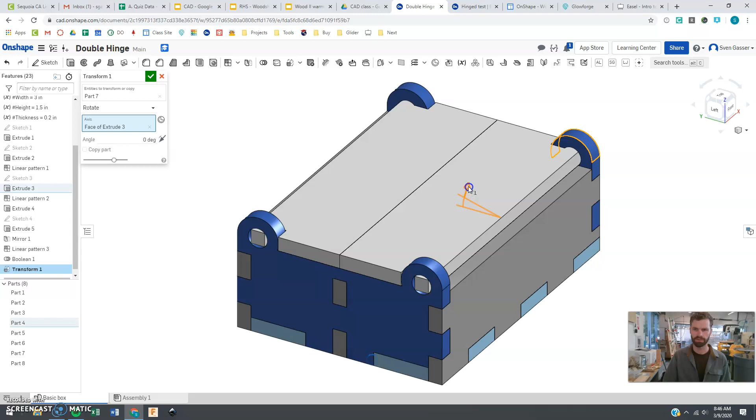Hello everyone, we are making a double hinge box. So you can see the lid's going to open like this, and you'll have one compartment on one side and then the same thing on the other side.

So we're starting with the box we made from last time. Go change these numbers, make it the size you want before we get started. And let's jump right in here.

So the first thing we're going to do is change the lid. So the lid no longer needs to go all the way across, it needs to go only halfway.

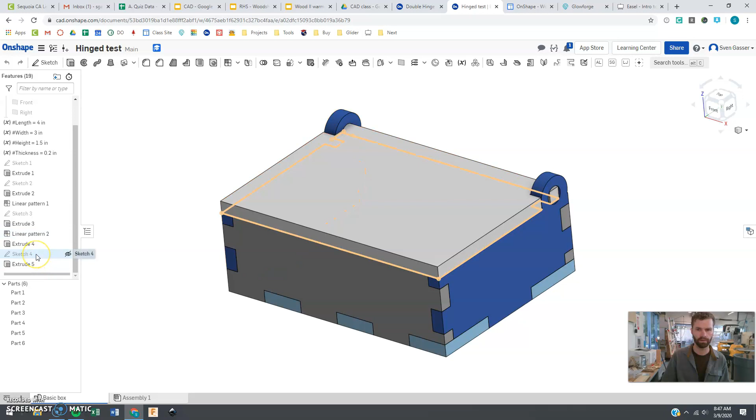So let's find our sketch that is controlling the lid, and that's not it. There it is. So let's open up this sketch, and let's look at the top view.

And we want to create a new line that's not going to be the center of this line because that line is not going the full distance right now. So let's just make an arbitrary line that's not locked into a certain position, making sure it's horizontal there.

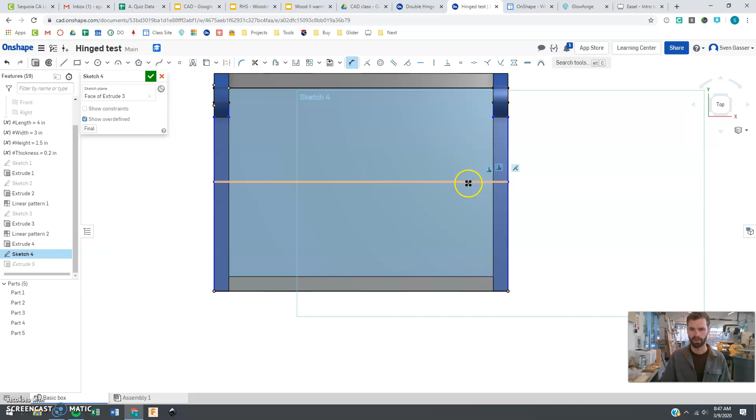And we're going to say the distance from there to there is the width divided by 2. So that's the real half of the box there. So now we can push OK.

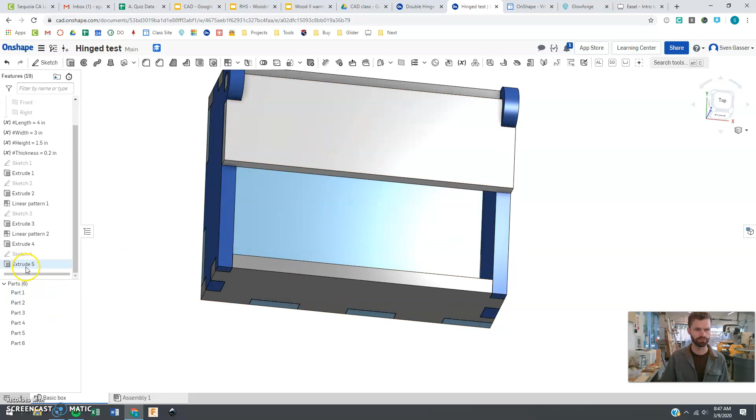Now I see my lid is only extruding this half there, which is great. Then, to make the other half of the lid, I'm going to use this mirror, which is not in the sketch mode. This is in the 3D modeling mode.

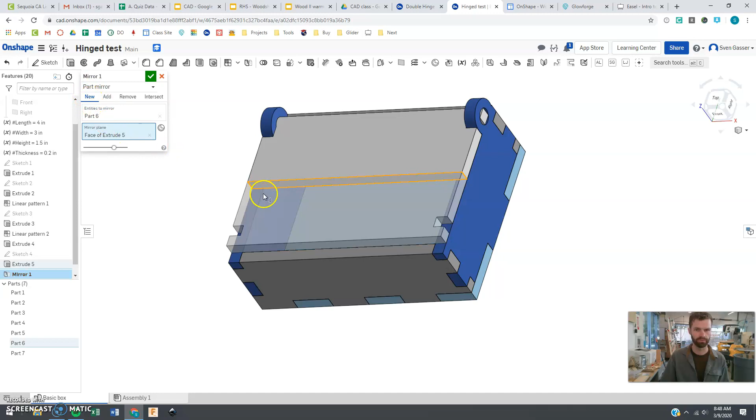And I'm going to mirror off this plane right here, making sure it's going to be a new feature, and that's looking pretty good. All right, now you can see right away the next thing we need to do is make sure we have the rest of the hinge on our side piece there.

So we're going to go back into this sketch that we have here, look at it from the straight on, and now we are going to create a mirror line that's exactly down the center.

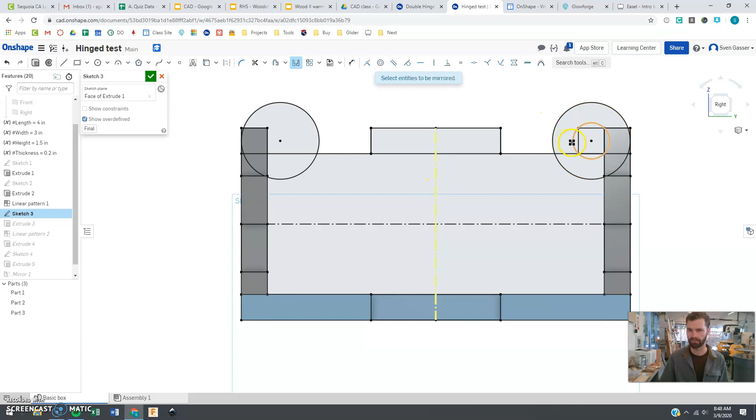And we're going to reflect this hinge construction parts that we have over here. And that's looking pretty good.

All right, and then we're probably going to have to change this extrude here, because right now it's not extruding all the parts we want.

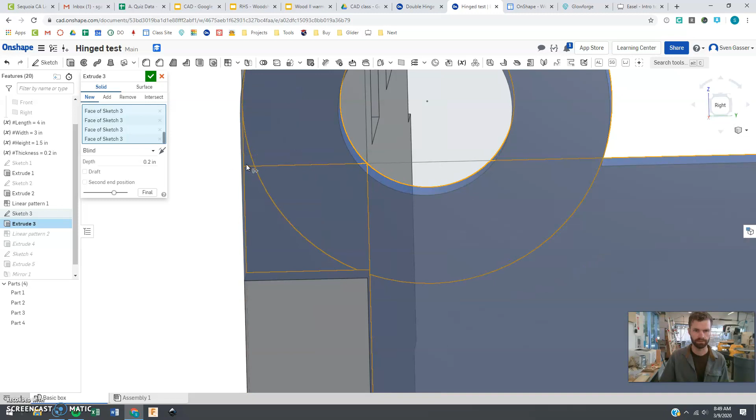So we want to extrude this and this and this, and let's get this little guy in there too. Make sure we get the little guy over there too. All right, that's looking pretty good now.

We'll say okay. All right, we are cruising. We got both the hinges there. The next thing we need to do is put the divider.

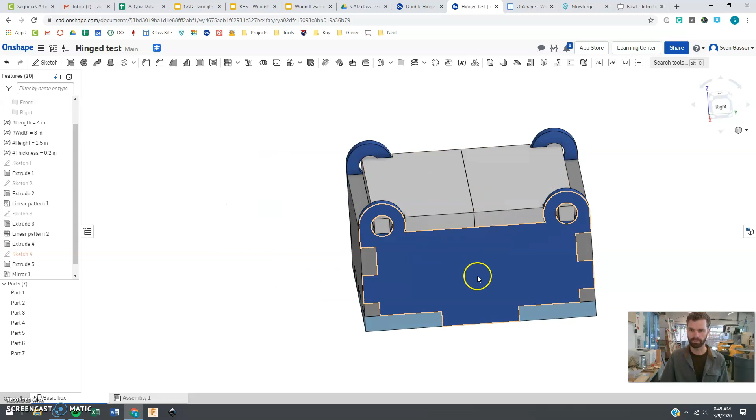So if you want this to be just one large open box, you can stop here and call it good. If you want that center divider, that piece going down the center as you see there, we got one more quick little step to do.

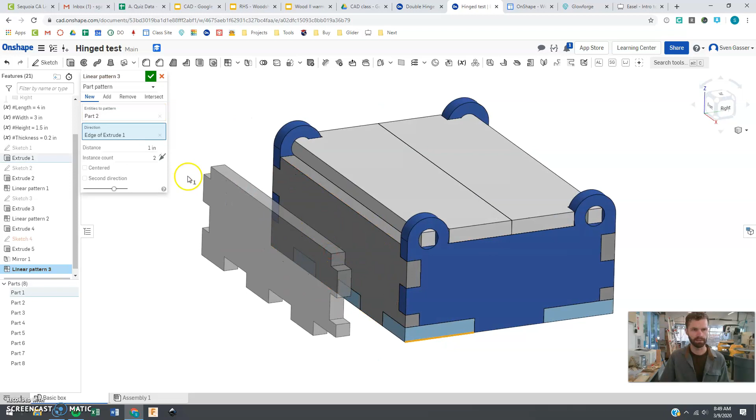We are going to linear pattern this side piece, because that piece that's going to go in the center here is really going to be the same shape as this side wall, and then we're going to make it go in the opposite direction. We want to make sure that it's exactly in the center.

So just like we were linear patterning things before, this is going to be width, and that's going to be minus the thickness. So if you see that now, it's going to actually show up right on the same spot as that one.

But it's actually this divided by... did that wrong.

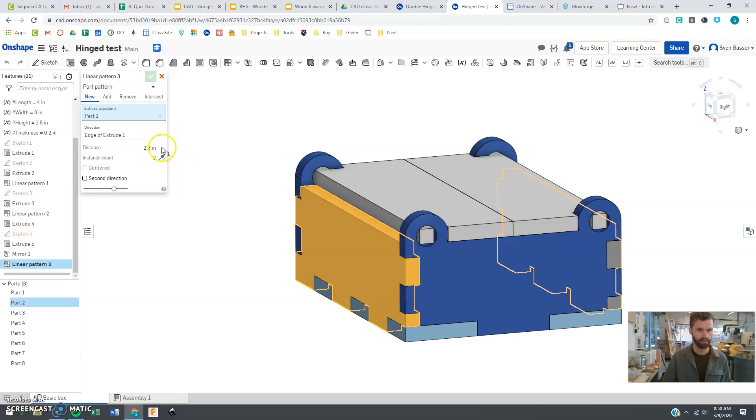See it showing up there. It's this whole thing divided by 2. So it's half, and there it is, exactly in the middle there. We're going to say okay.

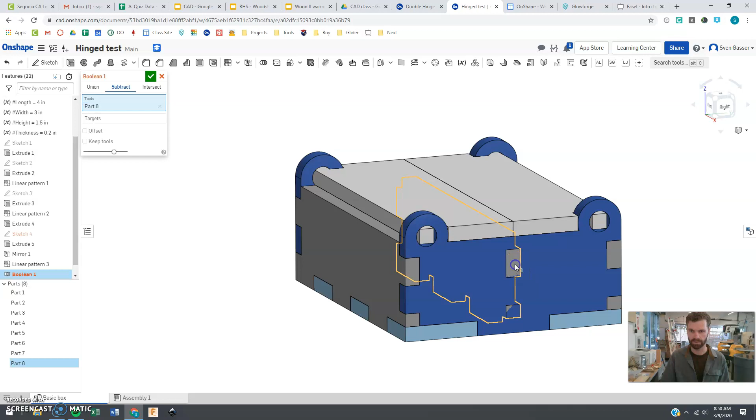Last thing we're going to do is use a Boolean to cut out the holes for this piece. Tools is going to be that center piece there. Targets is going to be the side, the bottom, and then the other side as well. We want to keep the tool, and bingo, we now have a box that has 2 little compartments inside there. All right, go ahead and export those, and you are ready to laser cut it out.

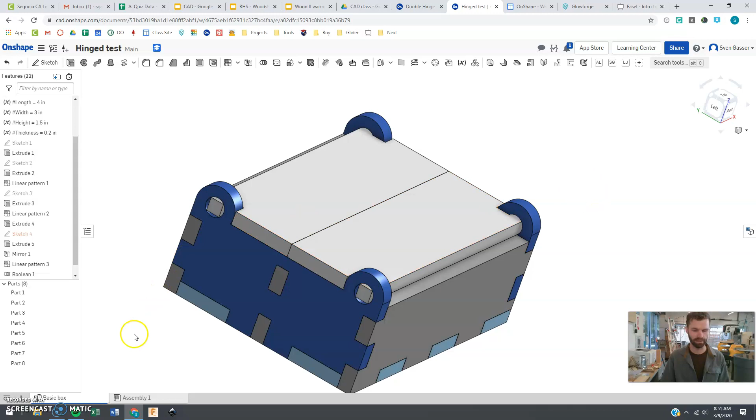We are back because some people wanted a little tab like this on theirs, so we are going to add one of those. Again, you don't have to do this, it's just another option.

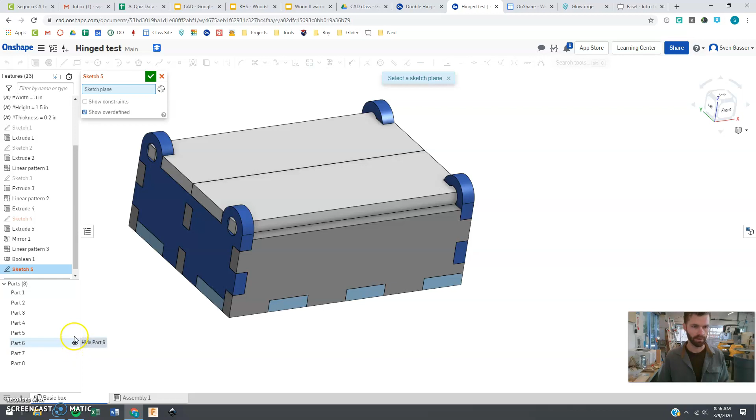So we're going to create a new sketch, and we're going to create that on that inside piece there, because that inside is going to have the actual parts we want there. So we're going to create this on that inside surface. New sketch right there.

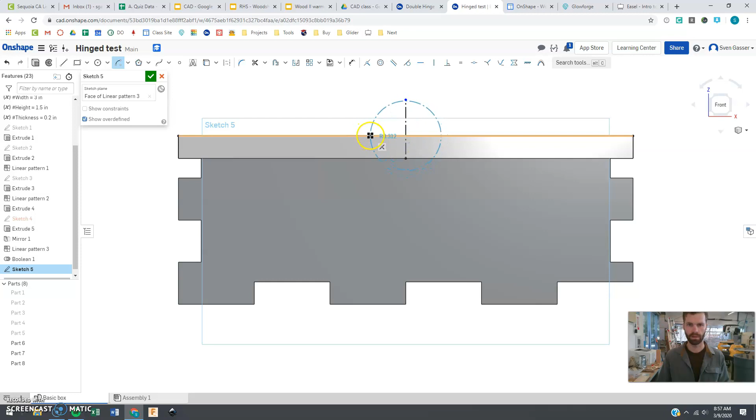And we're going to create a center line going straight up there, and that is going to be the center of our little tab here. And let's steal that line there from what we got. And I want a nice little arc going from maybe, let's try that again. Nice little arc from that's the center point, and something like that maybe.

So now I have an arc there, and I'm going to create a little line going straight down there, and then I'm going to make a rectangle that is going to be the thickness, it's going to be a square, thickness by thickness.

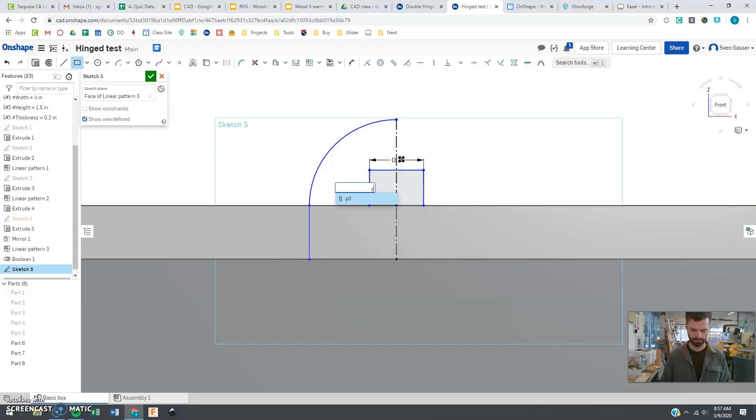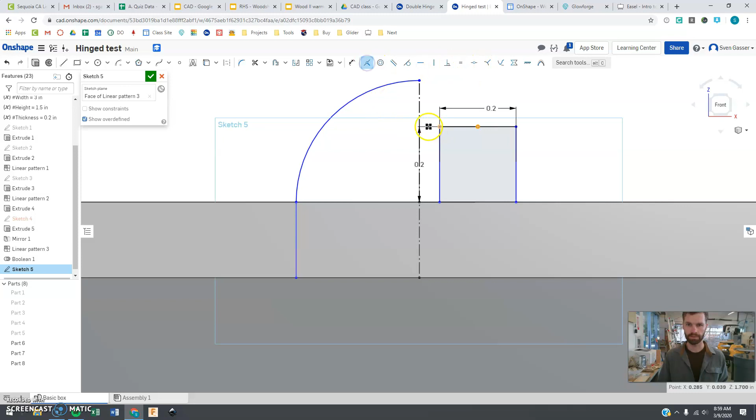All right, so now we want to create a, this is not exactly in the center, so we want to create a point here, then we can force this point to be coincident on this line, and boom, now that we know that that's centered there.

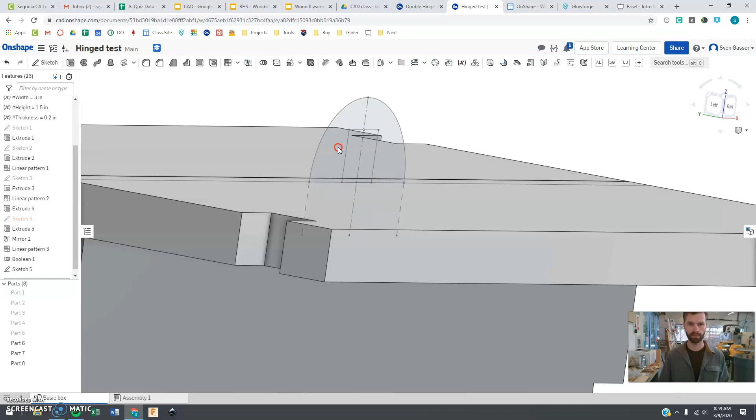So from there, we are going to reflect and mirror across this line, this piece and this piece, looking pretty good. And we now have this little piece there that's going to be working for us. That's going to be our tab. That is going to be able to lock this.

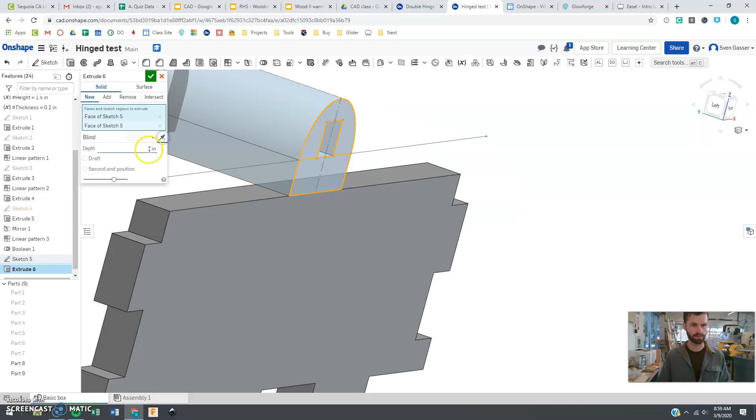So let's hide some of these extra parts for a second. We're going to extrude this surface and this surface, and we're going to go the opposite direction. All right, and we're going to add it to this piece. And looking good, all right.

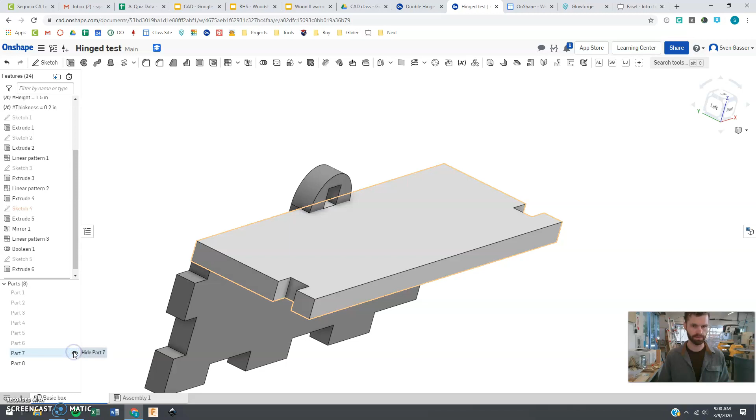And let's show our pieces here. Notice our lid is going through that, so we are going to want to do a Boolean on this one more time. We're going to say subtract. The tool is going to be this piece. Target is going to be these two pieces. And we're going to keep the tool. Oop, our tool disappeared, didn't it? Keep tool. All right, so now we have the box.

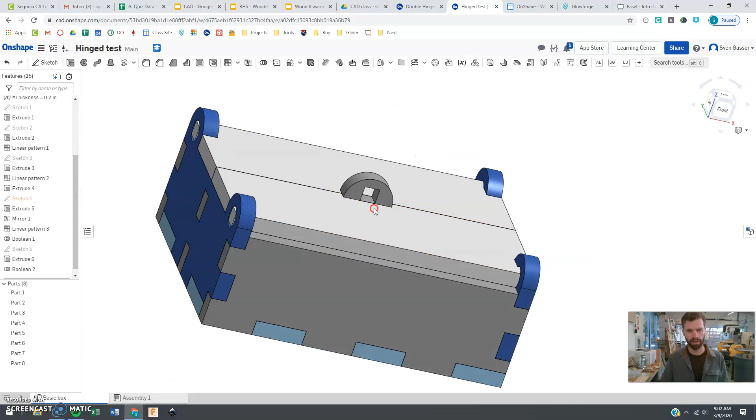We have the little tab sticking out there. All you have left to do is design a little pin that's going to fit in there. I'm going to leave this up to you, but you're going to create a new sketch on this little surface, and you get to design your own little pin that will fit in there. I'll leave you alone, making sure that it's going to fit.